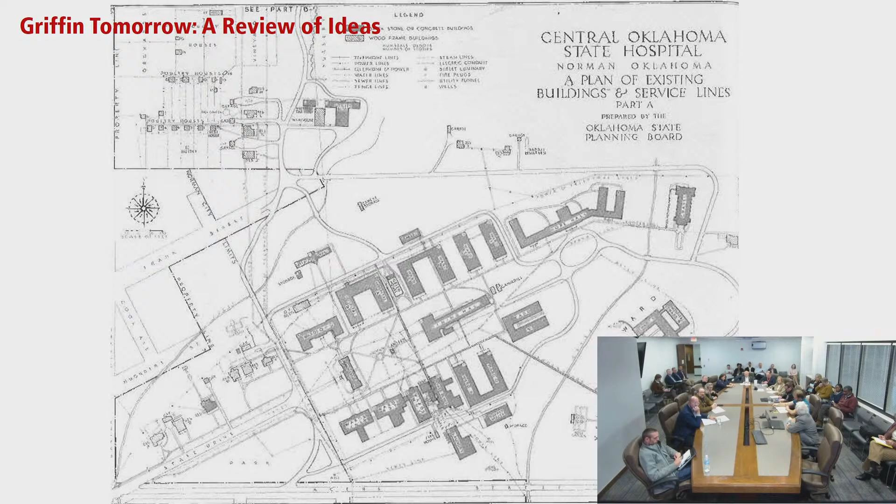There are essentially four things that we want to cover with you tonight. One are some analysis of the site itself, of the opportunities, limitations, and constraints on it. Secondly, the building blocks, that is streets and development modules and those kinds of things. Third, four concepts that are related to each other programmatically, but somewhat different in terms of what's incorporated in those sites, along with reviewing some of the new ideas or developing ideas that got introduced in each one. And then finally, some thoughts about implementation, about what to do and in what order.

So this is by no means the end of the process. Think of this as still an in-progress presentation.

So when we look at a site like this, we look at limitations, constraints, and opportunities, and things that we want to preserve. Some of those are pretty obvious, like Frances Cate Park, which is an important neighborhood open space, maybe not used to the degree that it could be, but an important resource.

Site issues like drainage are quite important. We've got two creeks, and we know that there's a lot of water that tends to accumulate in the southwest corner of the site. Our colleagues at Garber have done an analysis of some of the drainage patterns on the site, and we're happy to report that we are, except for one scheme when I didn't know what I was talking about, consistent with that.

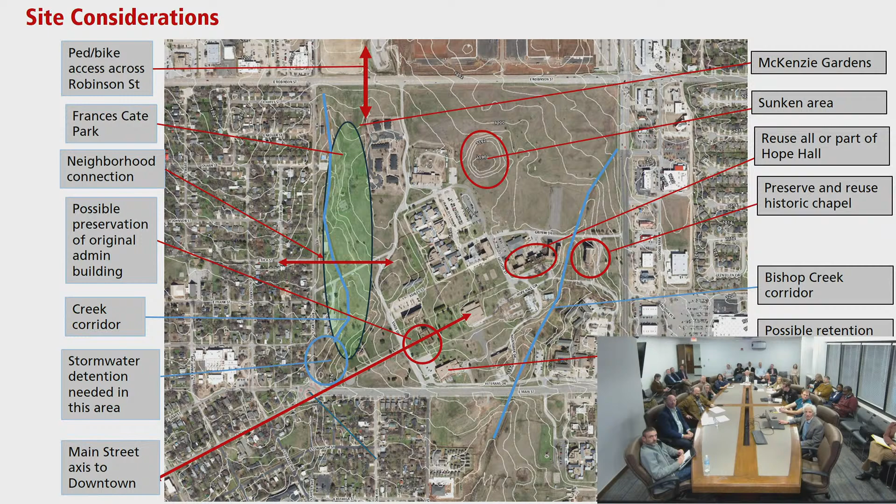The landform - in the middle we have this sort of moderate crater that we're not quite sure why it's there. You can see it, it's a sunken area. We don't know why, but we don't think it's a prehistoric meteor crater, but there it is. So those are all things to think about and work around.

There were some basic assumptions as we looked at this site as well, and hopefully they're on target. But we're looking at this primarily as a destination and a residential environment for the most part. We want it to be a significant place that draws people to it, that can become a bridge between the east and west parts of town. It wants to have that kind of role in terms of its location.

We're projecting, in terms of thinking about what goes on the site, accommodating about 5 to 8% of the housing demand that's generated and calculated in the comprehensive plan. So that gets us somewhere in the range of 1,600, 1,700, 1,800 housing units on this site.

We want it to be a great neighborhood experience for people who live there. We wanted to provide affordable housing for a variety of income groups. It needs to be part of its surrounding neighborhoods. It can become part of a surrounding greenway made up of the Sutton Wilderness Preserve, Griffin Park, and also the drainage way along Bishop Creek to the south.

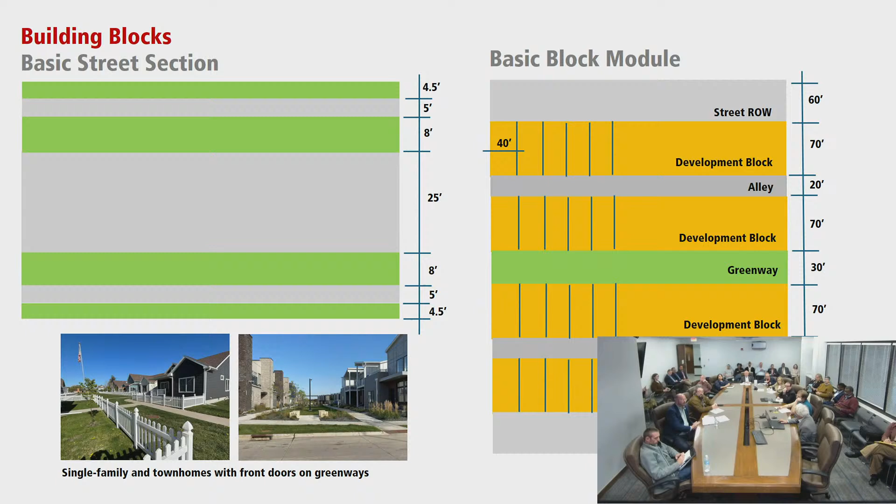Marty, seeing a plan like this is similar to one that I've seen used in New Orleans. Yeah, they had problems with access in there. Are the alleys — I know you got a 20-foot alley in there and that's a spacious alley, but with trash cans, with other things that seem to end up out there, is that large enough to stop? Yeah, it is, and you'll see in some of the schemes that there's specific places for that. Good, thank you.

So what can you do in a 40 by 70 foot area? Well, you can see how those are set back from the alley. You can do a single family detached house.

This is an example from a project that we conceptualized and then a developer built it in Excelsior Springs, Missouri, small lot single family houses with rear loaded garages, and then the building footprint on a very similar lot size. You can do semi-attached single family.

This is a project in Omaha, an owner-occupied project based exactly on this kind of module, where the garages are to the side of the main unit, and the semi-attachment is with the garages.

You can do duplexes, or you can do townhomes or row homes. So there's a lot of flexibility within this kind of a module, whether it's 70 or 80 or 90 feet, as Wheeler is, for example. But we think a 70-foot module is probably a good one to use for planning purposes. We don't know if it'll actually get built this way, but as a site layout and as a standard, it could be useful.

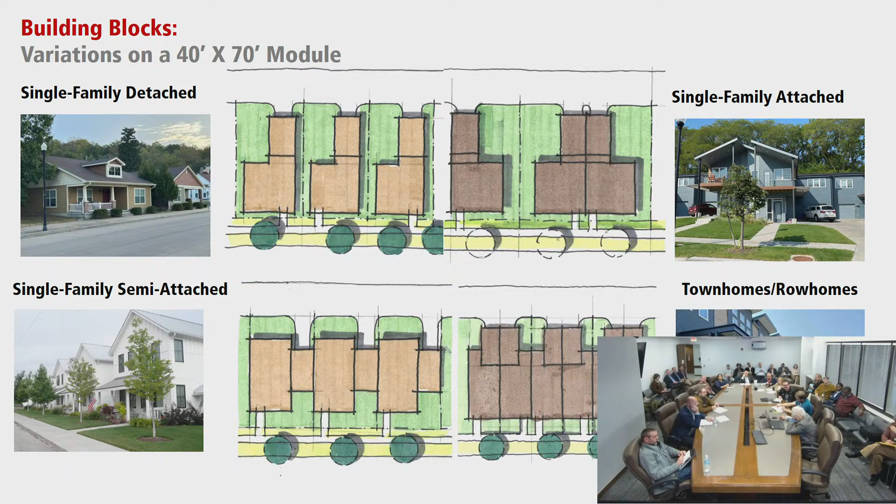If there's no obstruction and it's a wide street, the wider the street, the faster the cars move. People drive fast, and then they want speed humps to slow down the fire trucks. Generally, and a fire marshal would disagree with this, the risk of a kid getting hit by a speeding car is worse than the risk of fire. I say this as somebody who has kids who live in Los Angeles, by the way.

Okay, so those are the basic principles. We have four different schemes. Scheme number one we call the Green Belt. The idea here was a continuous green belt that would wrap around through the top of the site and come back down through the middle. These are the typical block sizes.

The church and Hope Hall are in an elliptical form. There's a big traffic circle around the depression there, primarily for ornamental purposes, and a Main Street setting that connects those two features together.

In addition to the town center, there's an interesting possibility on the southeast corner of the site that we've used in a couple of the schemes, and that's a production studio. We know there's an idea for that floating around the city. I happen to have a daughter who is a television writer in Hollywood and an Emmy-winning writer.

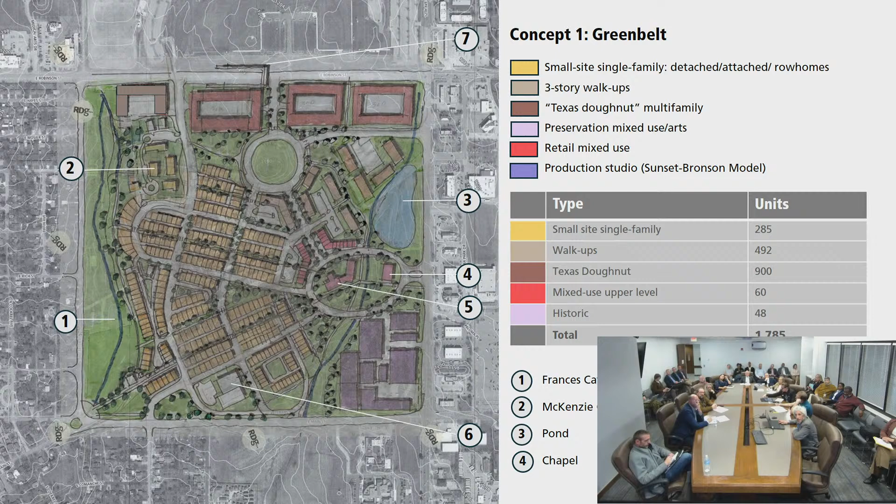This scheme has some things wrong with it, including too many Texas Doughnut buildings, which are those things on top. But it generates 1,785 units, assuming each of those 40 by 70 yellow boxes is a single unit. If they were townhomes, they'd be tighter than that. It's nice to be able to mix and match, though, so it doesn't have to be identical structures on each of those blocks. The things introduced in this concept are the Texas Donut.

Richard McKeon asked me, have you ever seen a situation where the lower level of one of these was used for townhomes and the upper level for standard apartments? And I said, yeah, actually, when we did the Core to Shore Master Plan for Oklahoma City, we showed exactly that concept. So there it is, on the left.

So it is possible. The central historical ellipse, the studio, and a pedestrian overpass over Robinson to connect this site and trails with the Griffin Park to the north. And then the residential module, basically what we're using is something very similar to this.

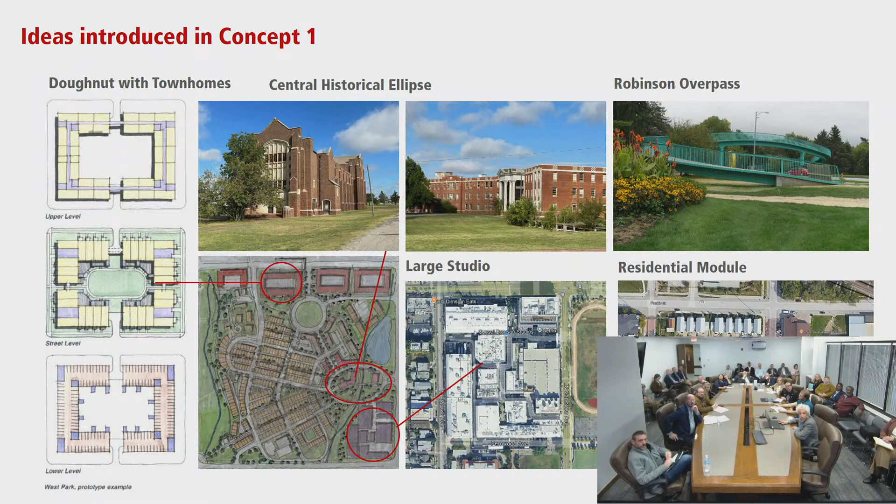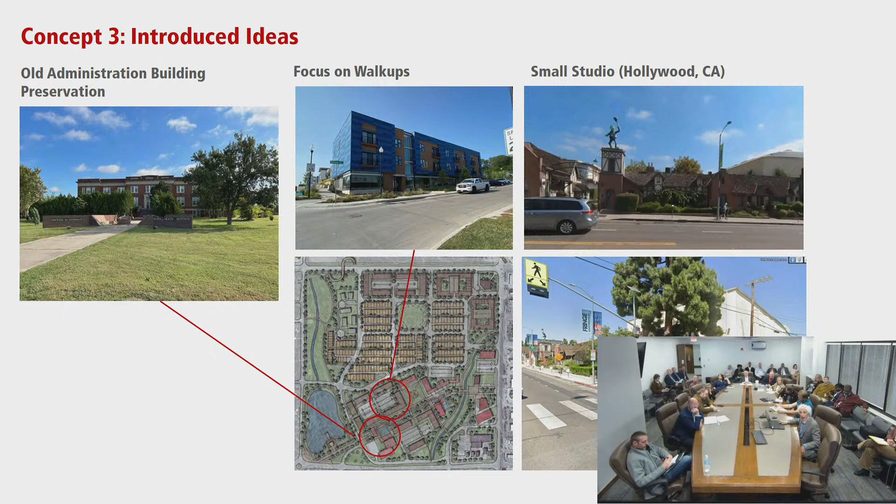Focus much more on walk-up units and on a smaller studio. So that one generates about 1,840 housing units.

And then more recently, concept 4, which is a refinement of the first concept, but actually quite different. When we were making the presentations a few weeks ago, there was some discussion about using the more curvilinear pattern that was in the first concept. I sort of played with that idea.

So you can see now the square is not there as such. There is kind of a main open space, but there's a main street setting that connects these two focuses. We widened the ellipse out and changed it somewhat so that the church, the steps building, Hope Hall—which could be converted to housing and maybe even artist housing—and another building all fit together into a composition.

We have a pier that goes out into the pond around the Edsel Ford House. Many of the other elements are the same, but it's another pattern to think about. So here we've changed the street pattern.

After a visit to Wheeler, thought that the commercial street was actually kind of a nice idea, although there are different ways to do it. And then finally, there's a project that, instead of the studio—although that's still not a bad idea—explores an enterprise or maker district kind of project with flex buildings and commercial, patterned after one in Oklahoma City on 164th and Portland that was brought to our attention. It's kind of an interesting project as well.

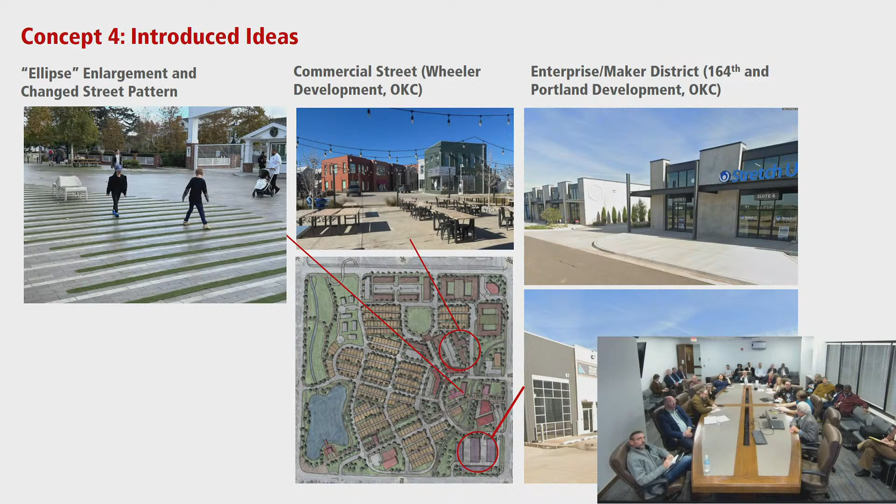So lots of pieces that can be combined and mixed and matched and so forth.

So finally we began to think a little bit about implementation. Part of our concept, or part of the whole reason for this enterprise, is to keep this from being split apart into small pieces and to keep it as a unified site that can be comprehensively developed. So that is important, and whether it gets built this way or not, having that kind of cohesive development where the pieces make sense with each other is really important.

This will be a community enterprise. It will be a public-private partnership that involves a lot of community support. Probably the city will wind up being at least the pass-through owner of the land.

There'll need to be a master developer, which might very well be a nonprofit development entity, like a development corporation that's capitalized and formed by community leaders, neighborhood, and various participants in community interests.

A master plan—this one maybe with modifications—would be developed with development guidelines. For example, if you know the project that developed at Stapleton Airport in Denver, it operated that way. There was a private developer who was the master developer, but put together a very detailed set of design standards.

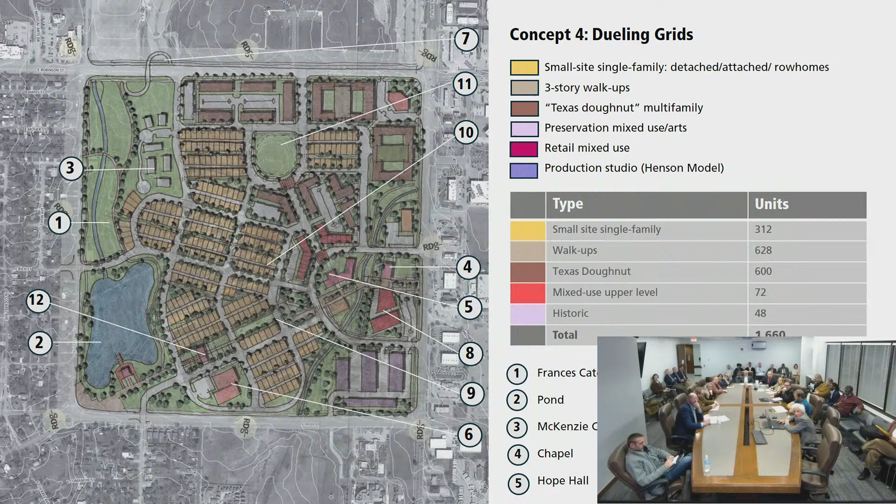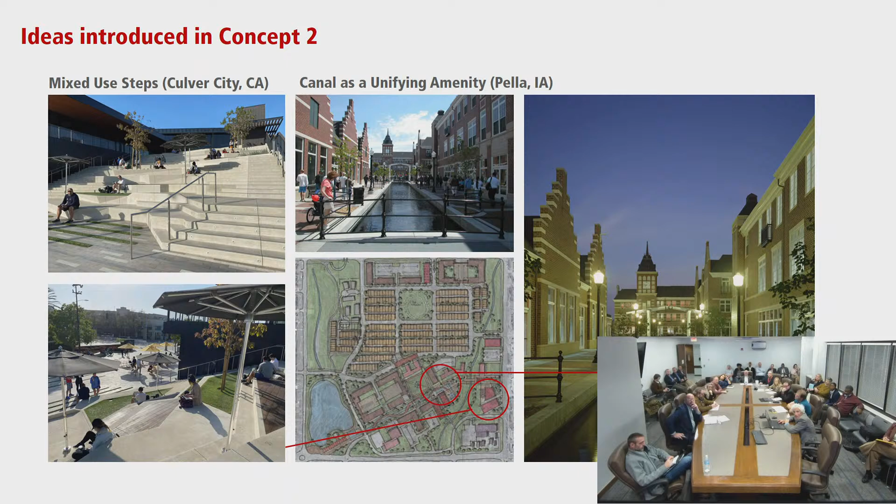I just want to give opinion on just a couple things. Scheme number 2, would you bring that one back up? I think that's the strongest one. And what I really love about it, the regional detention, because obviously in this area of town, stormwater is a huge problem. So anywhere you can park a big old detention pond like that and make it an amenity or a feature, I think that's good.

And then that Main Street access, just connecting that vista from downtown all the way through the site, connecting it to the chapel, making that a pedestrian thoroughfare - I think that's really strong. I love the rear loaded corridors with the alleys, no garages in the front. I like the Texas doughnuts. Not a big fan of surface parking, but some more garages.

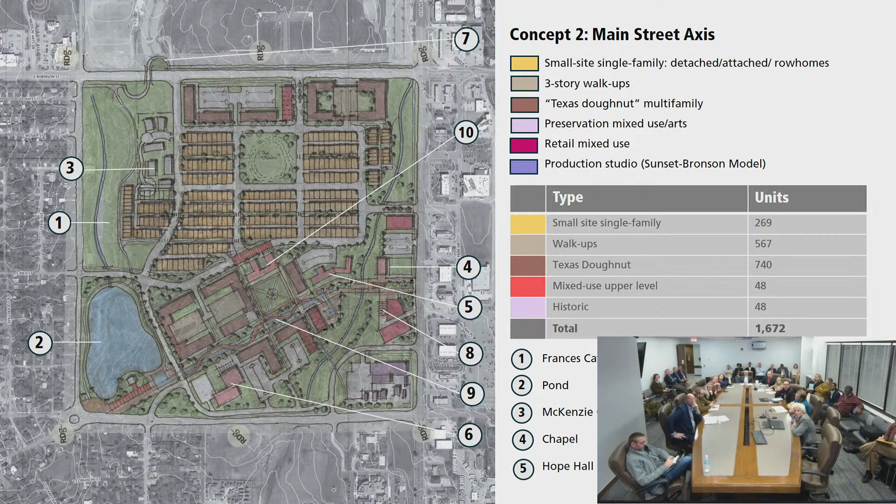And then I really like the corner element that you had up there on 12th and Robinson. So if you could incorporate that into that scheme. Yeah, 3 is a refinement of 2, with the same scheme with the walk-ups, the old administration building incorporated, and using and developing that corner.

So maybe 3 was the one I liked better now that I'm looking at it. Yeah, I think 3 is my favorite. I like 3 too because it had more housing units. 4, I kind of get where you're going, but then we went back like 200 units.

So yeah, just thinking about the growth in this area. Four was something that I was trying to make 1 work better. It's kind of what it amounted to, and it's all right, but of these 4 options, 3 is the best one. The entire site is an enterprise zone too.

Yeah, that's what I was saying. Thank you. Councilmember Holman? Yeah, 3 was gonna be my favorite one too. I also like the idea of, it doesn't maybe have to be mandated, but we'd be able to maybe encourage or require, potentially if that's what people wanted, that the new things built in the area architecturally and design-wise complement a historic look and not be a bunch of modern stuff placed in a historic area. So I think that'd be pretty neat to do.